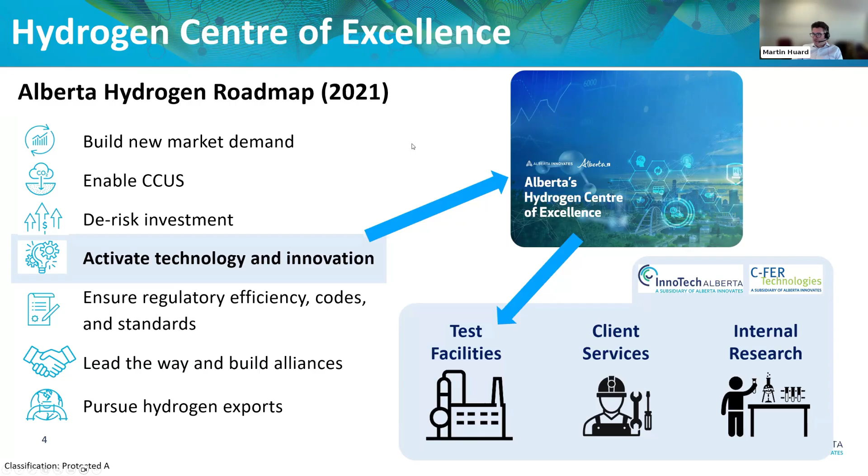Looking at global opportunities, gaps, and other challenges out there in the hydrogen ecosystem, some of the opportunities we see that were laid out in the Alberta Hydrogen Roadmap are relevant to Alberta. Globally, there's the potential for $700 billion in annual sales of hydrogen by 2050. So that's obviously a very ambitious forecast. There's also the potential for $11 trillion to be invested in the hydrogen economy by 2050.

And Alberta, within that global context, is very well positioned to take advantage of some of this opportunity. We have incredible resources for hydrogen production in Alberta. We have very extensive capacity for carbon capture, utilization, and storage. We also have existing hydrogen production and transportation infrastructure, as well as very skilled labor and expertise that's relevant to the hydrogen industry. And of course, in Alberta, we have a very innovative and entrepreneurial landscape.

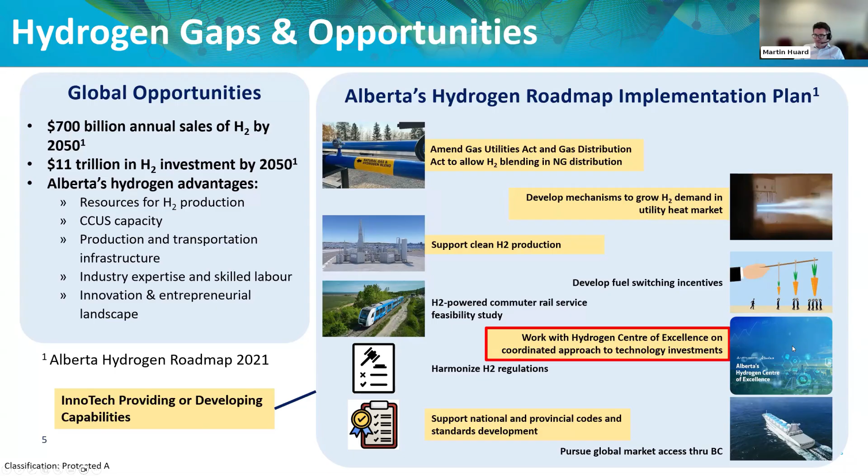The Alberta Hydrogen Roadmap also laid out a specific implementation plan of how it envisioned creating a hydrogen economy in Alberta. And InnoTech Alberta is in the process of either providing or developing capabilities in the areas that are highlighted in yellow. I won't go into all of those, but the topic today about hydrogen quality and purity is really stemming from the work we're doing in the Hydrogen Centre of Excellence, which I will briefly touch on in the next slide.

So through the work of the Hydrogen Centre of Excellence, InnoTech Alberta has been able to create a wide array of test facilities to support activities across the hydrogen value chain. I won't go into every specific piece of equipment or facility that we're setting up, but the Hydrogen Quality Centre is one of the cornerstones of the work we're doing in the Centre of Excellence to allow clients and companies out there in the world to send hydrogen samples to us for quality analysis and characterization.

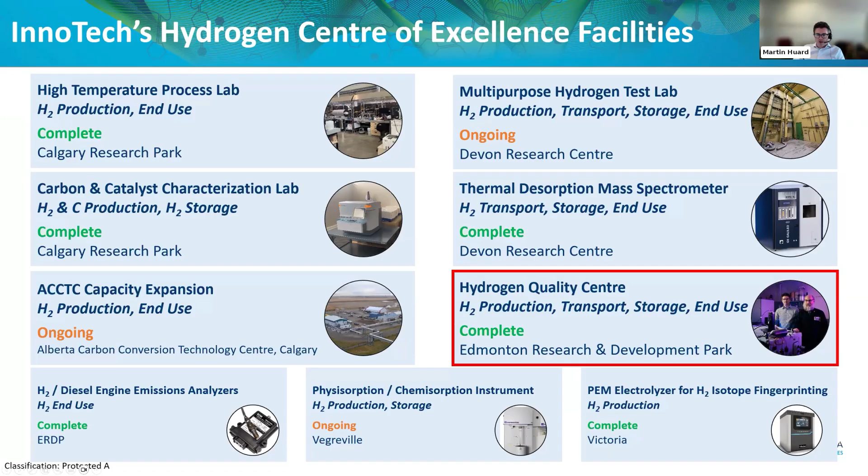So moving on now to the main topic of the discussion today, I want to briefly introduce the audience to the concept of the hydrogen value chain. This particular way of showing the value chain comes from the latest version of the hydrogen ladder, and that analysis is essentially a way of trying to assess which use cases for hydrogen are, at the global scale, the most promising or economic to pursue. So this is not necessarily specific to Alberta or Western Canada. It provides a more global view.

But what I like about how this hydrogen value chain is mapped out, from production through to transportation, distribution, and end use, is that it shows some of the main production pathways where hydrogen contaminants can enter the system. And it also shows various key components where contamination of hydrogen can occur as it moves from where it's produced through to where it's used by consumers.

So on that note, some of the key feedstocks used to make hydrogen are hydrocarbons, including natural gas, heavy oil, coal, or biomass, also water, and increasingly natural hydrogen. Some of the main co-products from hydrogen production, especially from hydrocarbons, include carbon dioxide and carbon monoxide, as well as particulates in the form of carbon. And in the case of hydrogen produced through electrolysis, oxygen can also be a key contaminant or co-product.

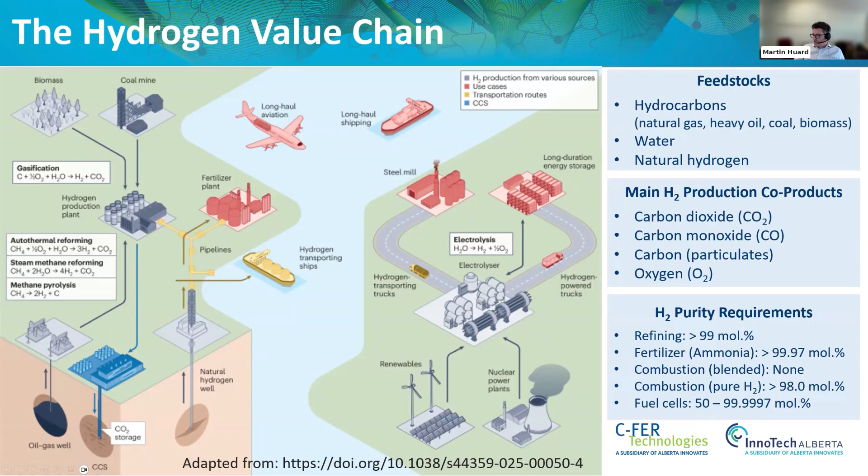So Adam, I'll switch over to you now to talk a little bit about why hydrogen quality matters. Great. Thanks, Marty. So I want to answer this question by starting with a really specific example that I think we can all relate to, and that is vehicles. The answer to why hydrogen quality matters for vehicles is very similar to why the quality of your gasoline matters for your vehicle. You're trying to protect the engine. You're trying to ensure that the materials you put in that device or that machine are compatible with that machine.

You want to make sure that when you go to a fueling station or you dispense energy, fuel from any source, that you know you're getting a standardized, known substance. It also then translates over to whether your warranty for your vehicle remains valid, whether you remain in compliance for having that vehicle be roadworthy. And just like with your vehicle, what you put in can affect how much maintenance you have to do. How often does that machine go down?

And so, if we're thinking about fuel cell vehicles, the answer is the same for fuel cell as it is for internal combustion. And at the end of the day, this is kind of a tapestry of both private and public sector stakeholders who are all trying to accomplish the same thing. They're trying to protect people that are using them, the people that are around them. They're trying to protect assets that are in the vicinity of a fuel cell vehicle. They're trying to protect the environment and their own reputation.

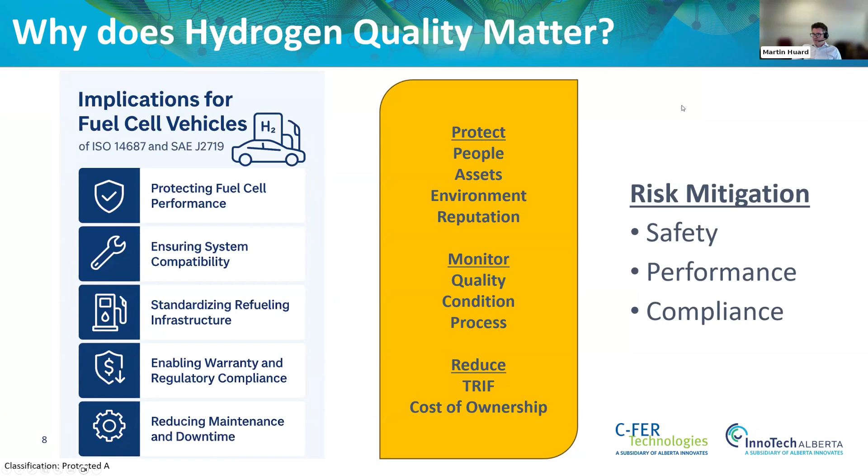So to set the stage for some of the later discussion, I want to quickly talk about what are some of the really key effects of impurities in hydrogen in the different use cases where it's used. So the diagram on the left shows some of the potential effects of using hydrogen with different impurities when it's used either for heat or for energy generation. So just to walk down the list quickly, some key effects across all the use cases include things like catalyst poisoning, equipment corrosion and degradation, reduced energy efficiency when hydrogen is used either in combustion or in power generation. Impurities can also affect sensor and control system malfunction or cause system malfunction, and impurities can also impose safety hazards.

The most important effect or the most damaging effect of impurities in hydrogen is certainly when they occur in fuel cells. So that really shows up in two main ways. The first is catalyst poisoning in fuel cells, and that consequently leads to decreased performance or energy efficiency in fuel cells. So this diagram that I'm showing on screen shows a few different types of impurities that can show up either in the hydrogen fuel itself that's entering into proton exchange membrane fuel cell, or contaminants that can come in the oxygen or air that's being supplied to a fuel cell stack.

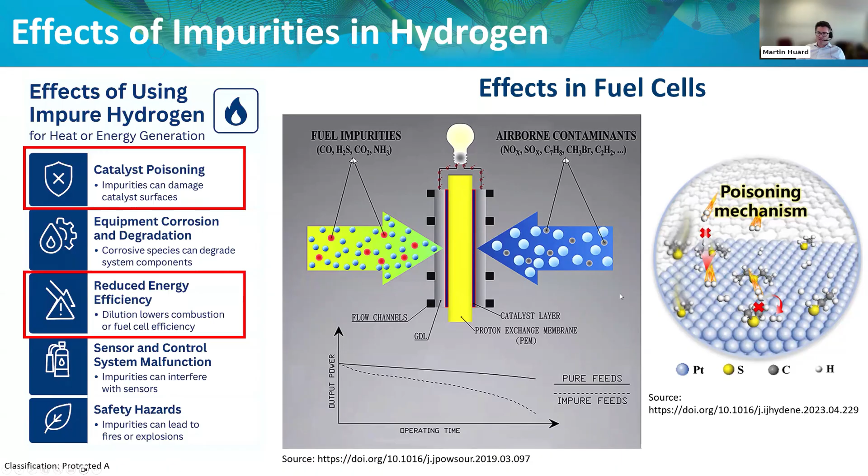So the next most important effect of impurities in hydrogen is on equipment, and that shows up as equipment corrosion and degradation, particularly in metallic kind of handling equipment.

So one category of impurities is with oxygen or water. Those can lead to corrosion of metallic components. And the next category is sulfur compounds that kind of work in synergy with hydrogen to lead to sulfidation corrosion or stress corrosion cracking, or potentially both. So it's really important to select materials properly, but also to purify hydrogen to keep these impurities out so these damage mechanisms do not occur.

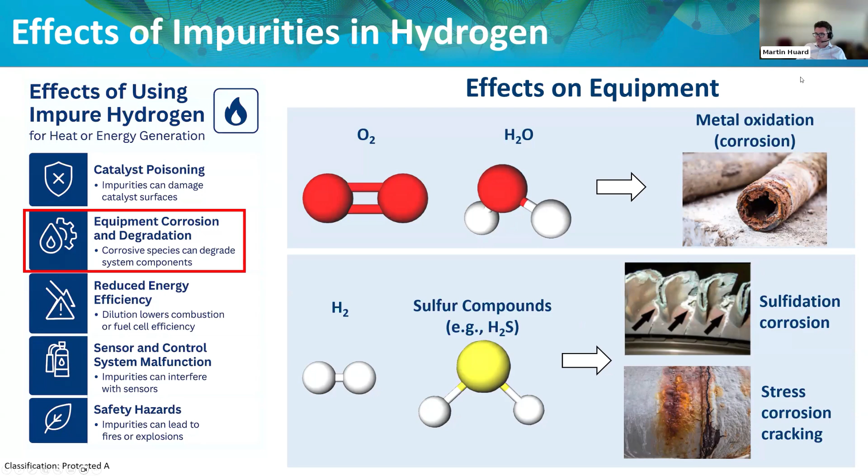Adam, switch over to you to talk about various impurities. Great. Thanks, Marty.

I want to talk about the word impurity for a moment. Impurity is anything that's in hydrogen that isn't hydrogen. So that is literally everything except hydrogen. But there are a number of impurities that we know impact the technology of today. And I've broken them out into 6 categories. I won't list them all out for you. You can see most of them on the screen, but the categories are fixed or inert gases, sulfur compounds, moisture, halogenated compounds, organic compounds, and then solid particulates and an oil mist.

Moisture gets its own category because H2O can be in many different forms, gas, liquid, solid. But the gas form is probably the most damaging as it is carried through any hydrogen stream. What I will say is that these are the impurities that are of concern today. These are identified as pain points or incompatibilities based on the limitations of technology today. And technology means both production method and the end use apparatus or machine or components.

And all of these compounds, there are known ways to analyze them. However, detection limit has always been kind of the Achilles heel for a lot of these compounds. And I'll get into that in a little more detail coming up, but I just want to plant the seed for you now that when I talk about impurity, I'm talking about everything other than hydrogen. And Marty, can you just advance the slide for me?

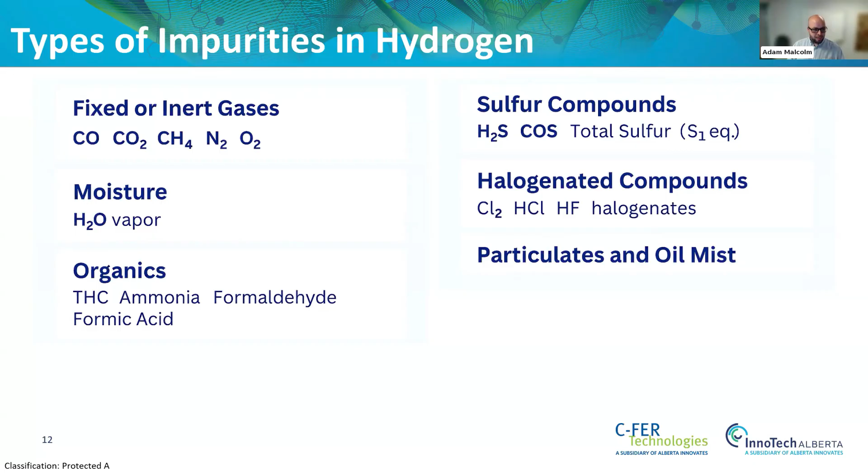Where these impurities come from is also sort of dependent on the production method you use and the feedstock you use. I don't think it's a surprise to say that the quality of the feedstock you use affects the quality of the product you get out. I think we all kind of understand that innately. And when we get a product and we're trying to purify it, if we don't purify it completely, obviously we get a less pure product on the outside. I'm saying things that are very obvious.

But the 3 main ways that we produce hydrogen can yield different impurity profiles. The first being steam methane reforming, has the widest array, I would say, of impurities, but for the most part, they are the easiest to analyze. So that's like carbon monoxide, carbon dioxide, sulfur, nitrogen, oxygen, anything that's from the air.

Electrolysis has a pretty narrow profile because you're taking water, ideally very pure water, and most of your byproducts of electrolysis are oxygen, hydrogen, some of the nitrogen that gets through in an airstream, and then the water itself that you used. Now, if you use a water source that has an electrolyte residue, electrolysis of electrolytes can lead to things like chlorination and bromination. They're usually slightly smaller in scope here in terms of how much residues in the hydrogen gas, because you're usually starting with hyper-pure water to begin with, but it is a risk.

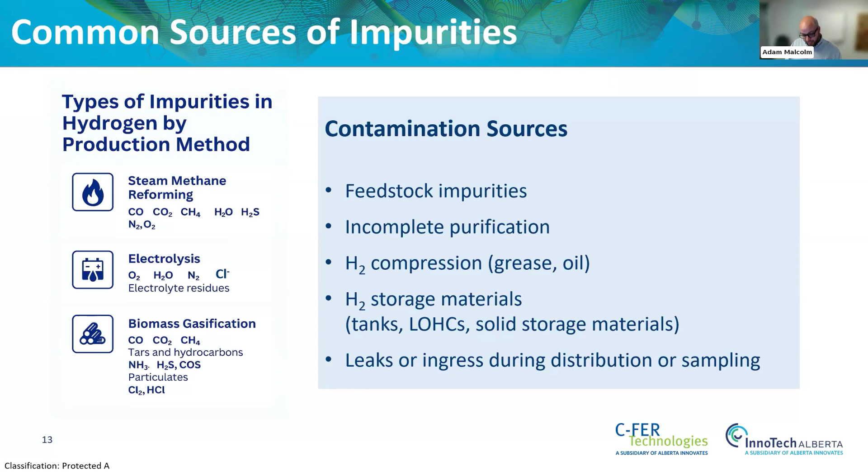And with that, Marty, I'll pass back to you. Perfect. Thank you, Adam.

So everything we've said so far about different impurities and how to analyze them is very important. But there's a key step in the production process, and potentially also at the dispensing or use side of the hydrogen value chain, which is about purification. So there are many different purification methods that exist, but two main ones that I'll touch on briefly today are pressure swing adsorption and membranes. So these are the two most common methods applied in industry for cleaning up hydrogen and removing impurities.

So with pressure swing adsorption, you essentially have a sequence of layered beds of different adsorbent materials, and a hydrogen product is passed through the adsorbent bed, and impurities are removed. The hydrogen emerges typically at high pressure from this process, and the desorption of the impurities that have been removed is kind of exhausted as a tail gas stream. So this particular method is commonly applied from small to very large scales. I would say it's probably the most common method of the two.

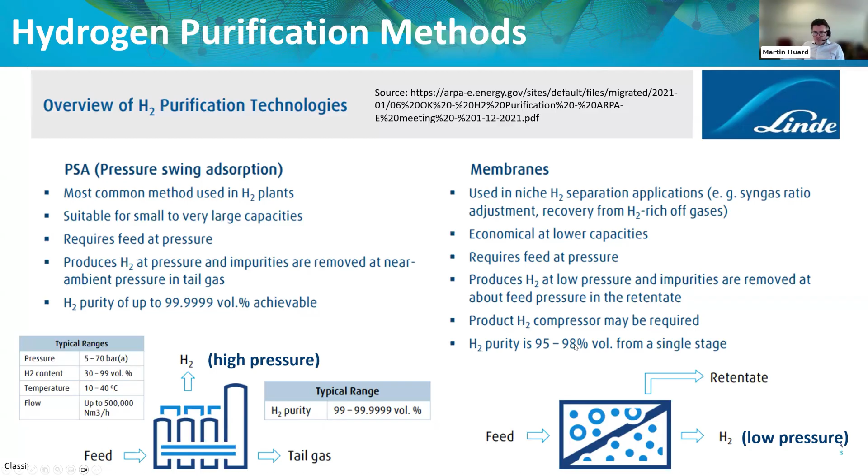So what this essentially means, comparing the two methods, is if you want to have a hydrogen product at a high pressure, with PSA, you don't need as much compression after the process to keep the hydrogen at a high pressure, whereas with membrane separation, compression is almost certainly required after membrane separation to achieve the desired pressure. With membranes as well, when you just pass the hydrogen through it in a single pass, the purity you get in the product hydrogen is a little bit lower than what you'd get with PSA. So you typically need to go through multiple membrane stages to achieve the same purity.

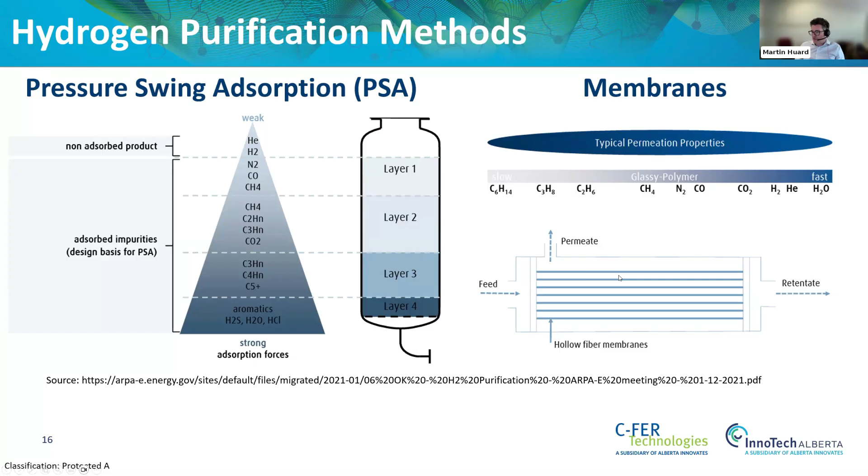The next slide here just shows a couple of diagrams of, in very conceptual terms, how PSA and membranes work. So in the case of pressure swing adsorption, you essentially have different layers of adsorbent materials that target the adsorption of different impurities in your hydrogen product. So you can see, typically you'd start by removing easier things like aromatics and sulfur compounds, and you'd gradually progress to remove more difficult fixed gases like nitrogen, carbon monoxide, and methane. And what comes out is your purified hydrogen that does not adsorb to the material in the PSA unit. For membranes, as I'd mentioned before, you're essentially feeding your hydrogen product through, and hydrogen is the only product that gets through, depending on what kind of material is selected for the membranes.

Oops. The last thing I'll mention on the topic of hydrogen purification methods is relating to relative costs for pressure swing adsorption and membranes. So I've grabbed this one figure that shows different cost components to the final cost of hydrogen coming from different production methods and layering on different, say, transportation methods and use cases. And purification shows up as a cost component in several of these use cases. So the one I'm highlighting here is for a high pressure hydrogen product produced from steam methane reforming, and it compares pressure swing adsorption to membrane technology.

So if I take these two bars and translate them over to this table on the right, you can see that the purification cost itself is on the order of about 10 cents US dollars per kilogram of hydrogen, with the membrane purification being slightly less expensive than PSA. But if you want to achieve a high pressure hydrogen product, like I mentioned earlier, you have to add more compression energy to get to your high pressure conditions, which means that pressure swing adsorption plus compression winds up being a little bit cheaper at the end of the day than membrane purification.

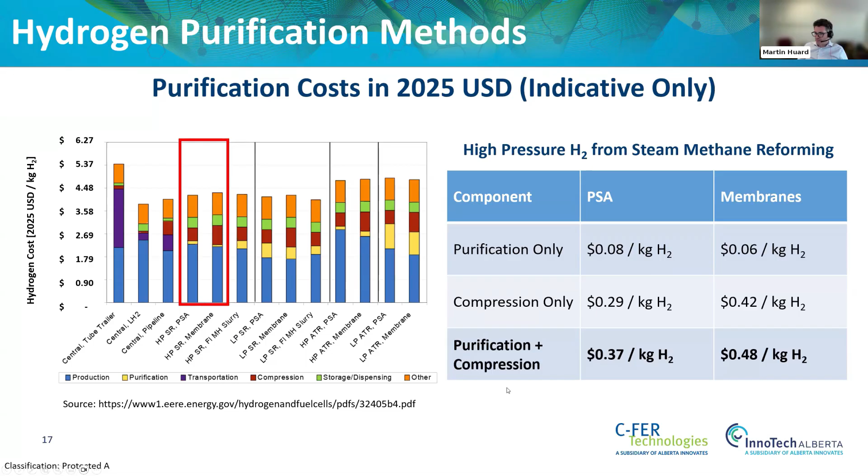So with that, I will switch over to Adam again to talk about quality standards.

Sorry, Adam, you're muted. Technical difficulty. Thank you.

So what you see on screen right now is a table that I've taken or replicated from an international quality standard called ISO 14687. And it covers the different impurities that are allowable within hydrogen fuel for a fuel cell vehicle. And this covers, to be more specific, type 1 and type 2 grade D hydrogen. So type 1 is gaseous, type 2 is liquid, and grade D is for PEM fuel cell vehicles that are roadworthy. And what you'll notice here on the right-hand column is the maximum allowable concentration of the impurity in that hydrogen stream before it is known to start causing harmful effects within a PEM fuel cell.

We don't need to go through the nitty-gritty of each one because their limits fluctuate based on the technology of today and the needs of the fuel cells that they're going in. But I want to draw attention for a moment to the bottom two rows, these yellow rows where it says total non-hydrogen gases. Remember when I said impurity was everything other than hydrogen? So that means that the total non-hydrogen allowable going into a fuel cell is 300 parts per million, which means that your hydrogen at a minimum has to be 99.97% pure.

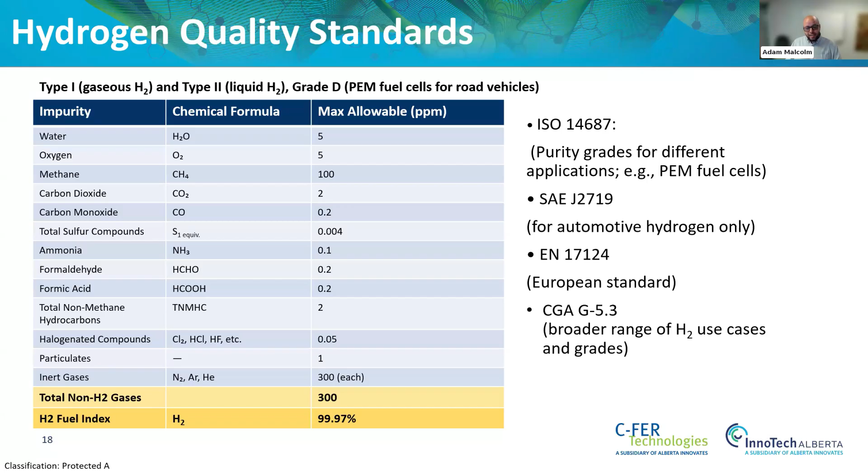So with that, I want to go to the next slide, and I'm going to take a moment to talk about terminology. So I was using the word purity to describe the hydrogen fuel index at 99.97. Purity in this case refers only to the amount of the gas you are selling, or that you want, or that you're saying hydrogen and you mean purity of hydrogen. So 99.97% only includes the hydrogen in that term.

When I talk about the quality of hydrogen, I'm including the purity as well, but I'm now encompassing everything else that's in that 0.03% that remains. And it is critical that we look at that 0.03% because it can contain very low levels of highly problematic compounds like sulfur compounds and halogenated compounds.

The quality of a hydrogen product is related to the end application. So I can't say by default that a high purity hydrogen is therefore a high quality hydrogen. They are independent terms. You can have a high purity hydrogen that is of low quality if you're intending to use it within a fuel cell.

I will draw again a parallel to gasoline and internal combustion engines. The gasoline that your engine uses to run is not what we test for when we are testing those fuels to determine if they are compliant with the engine or not. We make the assumption that the bulk of the material is the gasoline, but we are looking for things like heavy metals, water, anti-knock agents, ensuring that the octane grade that's at the pump matches what you are being delivered within your vehicle. That's the quality of the fuel.

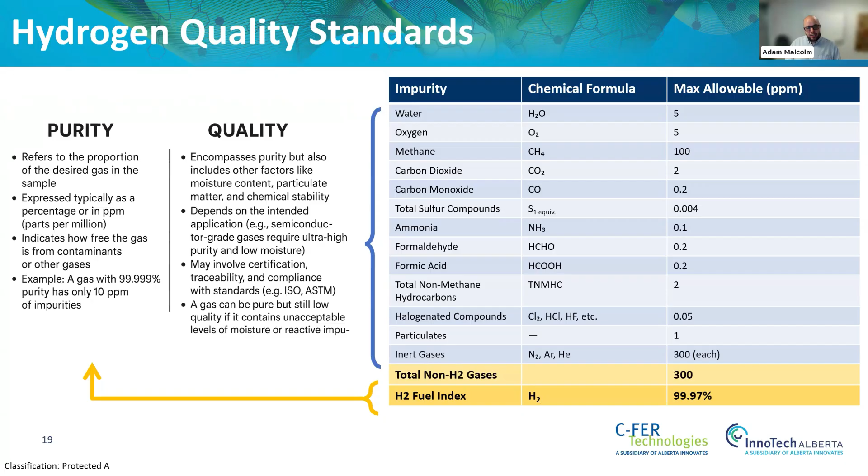So in the world of hydrogen, that regulatory framework is not fully in place just yet, but we will get there eventually. But for the time being, I really want to hammer home this terminology of purity versus quality. Something can be five nines pure and potentially, depending on the application, still be of low quality, or at least not appropriate for that application. So with that, Marty, if you want to go to the next slide for me.

We have established ways of analyzing all of these, thankfully. We don't need to reinvent the wheel. Like I mentioned before, detection limit has always kind of been one of the limiting factors, but our techniques have gotten to a point where we can analyze everything on that list, and we can analyze it quite well.

There is, however, no standardized, or what we call referee list of ways to analyze these compounds. There are recommendations, there are best practices, but unlike in the world of, say, gasoline, diesel, jet fuel, there isn't a regulatory body within our governments or within the private sector that says you all have to use the following methods to analyze your fuel in order to be compliant.

So I will go over some of the recommended options in just a moment, but I will say that in general, all analytical techniques for hydrogen are going to use some combination of gas chromatography, mass spec connected to gas chromatography, and FTIR.

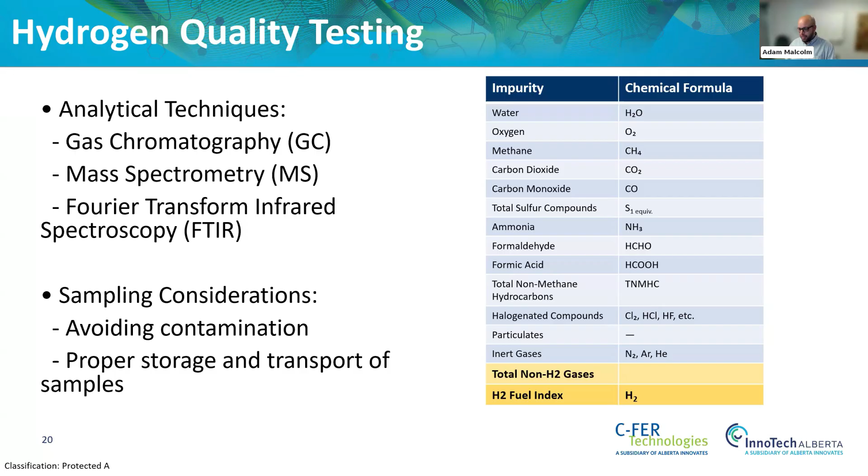But on top of that, you also need to consider how you're sampling your hydrogen, because theoretically, as you sample and as you transport and store hydrogen, you introduce impurities that you're then going to analyze. So that's a consideration that always needs to be there, but it's not something that gets solved by having better and better analytical techniques. So Marty, if you want to go to the next slide for me.

Here, I've given some recommended methods for analyzing hydrogen. You can see I've given them under the heading ISO 21087. They'll have very easy to remember 5-digit numbers. But this ISO standard effectively lays out recommended methods for analyzing hydrogen, but to be clear, is not prescriptive. So it has some methods that have shown to be a good or best practice, but is not necessarily the only method you need to use to analyze.

So there's a method that includes a sulfur detector for measuring total sulfur compounds. There's a method that uses an FTIR for analyzing IR active compounds. We have an ECD detector for analyzing halogenated compounds. But there are other methods out there that are being developed. I'll call them custom methodologies because they're just not standardized yet. They use other types of detectors or other ways of analyzing these compounds, PFPD being one of the more common ones for analyzing sulfur, and XCD being one of the more up and coming ones for analyzing halogenated compounds.

The key here, and anybody who's worked in the analytical services sector knows, is that there are three major, we'll call them boxes, you need to check if you want any of your methods to be considered valid and accurate. And that's traceability, metrological traceability; accreditation, so having a third party audit your process to ensure that bias isn't being injected into the results; and then certification. Are you certified to perform the services, and are you able to certify the fuels that you're analyzing? These are the three things that any lab, any facility, any company that wants to analyze hydrogen and do so in a transparent and reliable way will need to hone in on.

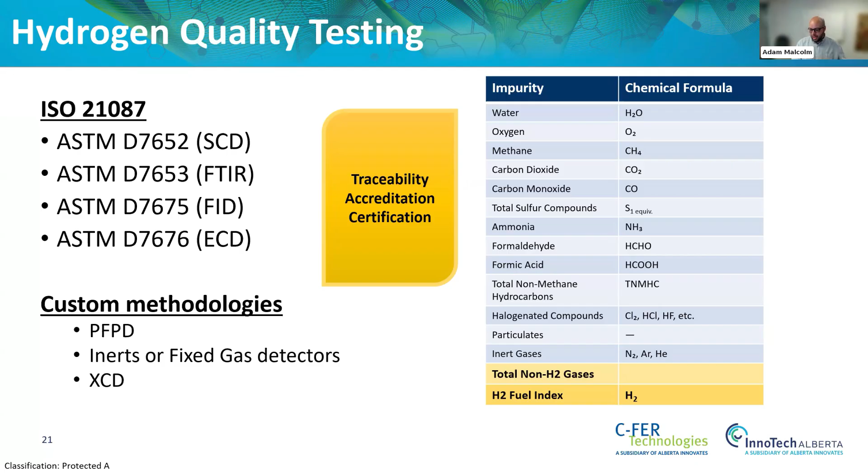And so with that, hopefully I've given you a good picture of what hydrogen quality means and how you can ensure quality in the value chain. Marty, I'm going to go to the next slide, and I'm going to cover the challenges and best practices that we've identified. This is non-exhaustive. This is based on our perspective and our experience working in this sector. And people in the audience, you may have different challenges and different best practices. We'd like to hear about those as well. So I've broken them into three categories.

The first, which Marty brought up initially, is the supply chain, the value chain, maintaining hydrogen purity and hydrogen quality in the hydrogen supply chain. So that is going to mean your purification method needs to be robust, highly sophisticated, but it also means that your product needs to be analyzed at every point in the supply chain and somewhat frequently, depending on how often your feedstock or your process is changing.

The second is in the calibration and the validation of the equipment that you're using to analyze hydrogen quality. One of the biggest gaps right now in hydrogen analysis is that there's a very narrow selection of standards and certified reference materials to build analytical methods on. And so we're kind of in a chicken and egg situation. We need to create highly pure, high quality standards and reference materials, but we need to be able to prove it with certificates of analysis that require us to develop highly sophisticated analytical techniques.